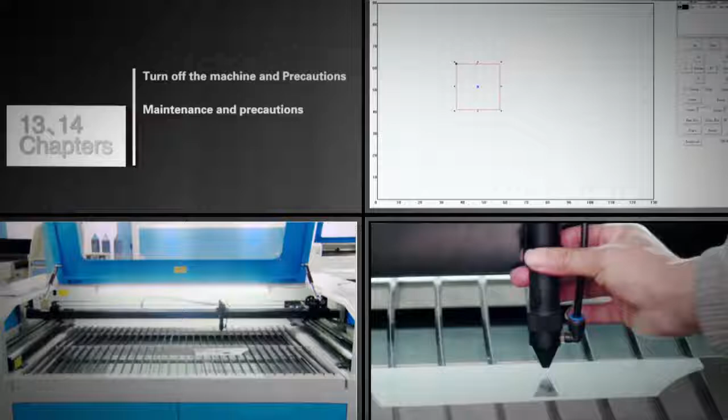Installation and operation of the JQ1390 laser machine.

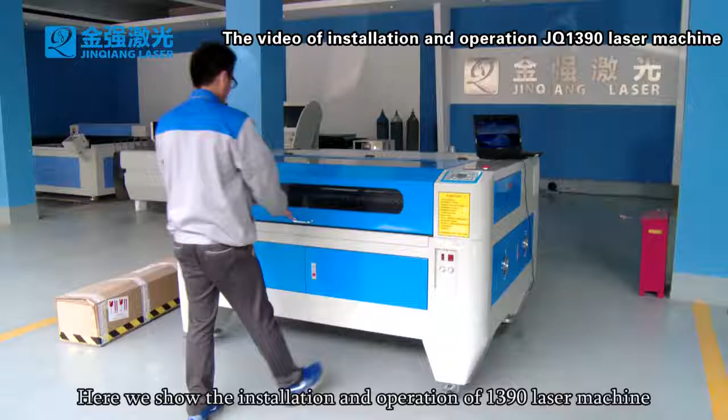Preparations before installation. Here we show the installation and operation of the 1390 laser machine. Before installation, we should prepare 220 volt and 110 volt power supply, a computer, pure water, screwdrivers, pliers, and a voltage regulator, in case the voltage is unstable or the laser power is higher than 150 watts, it is suggested to equip one.

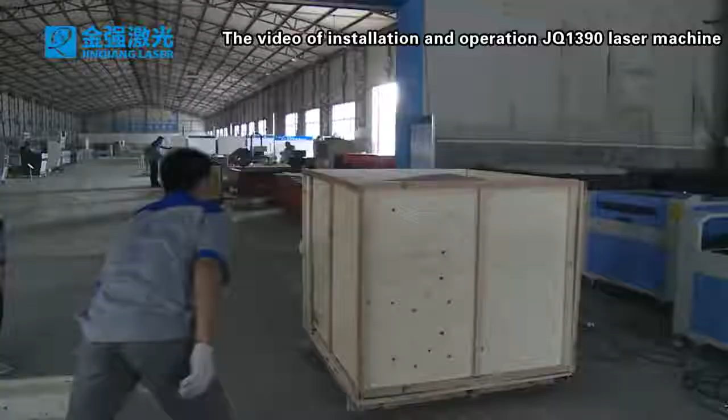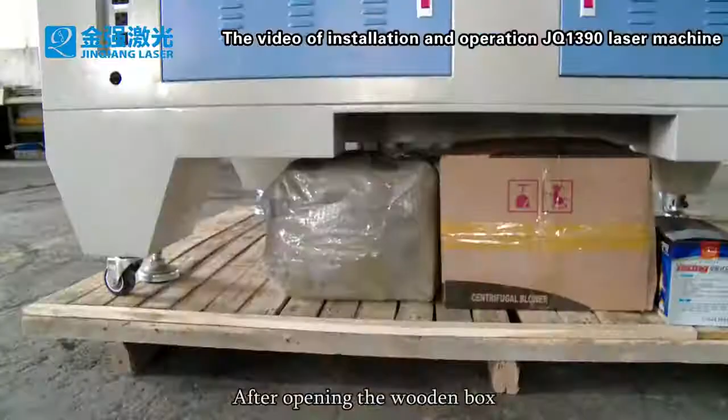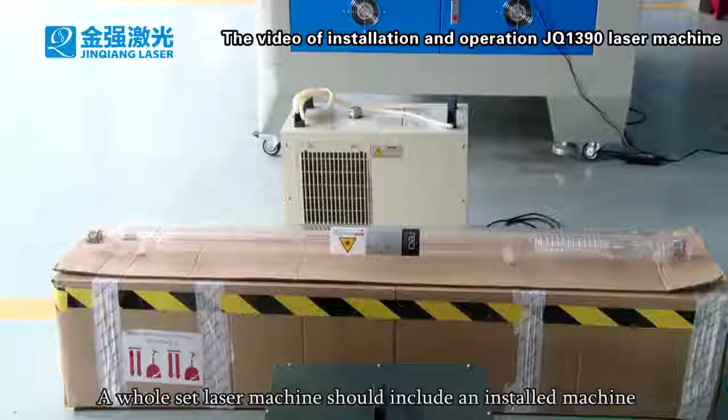Open the package and verify the machine accessories. Firstly, remove the outer wooden box, then tear down the machine's outside stretch film carefully. After opening the wooden box, find the related accessories and double check. A whole set laser machine should include an installed machine, laser tube, water chiller, air pump, exhaust fan, toolbox, and file bag. After careful inspection, please contact our factory promptly if there is any damage.

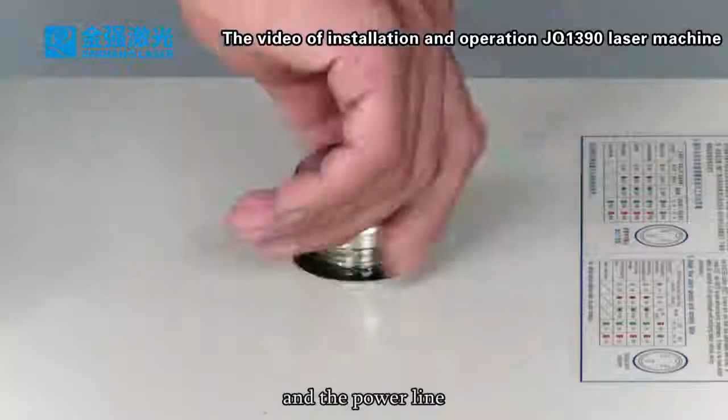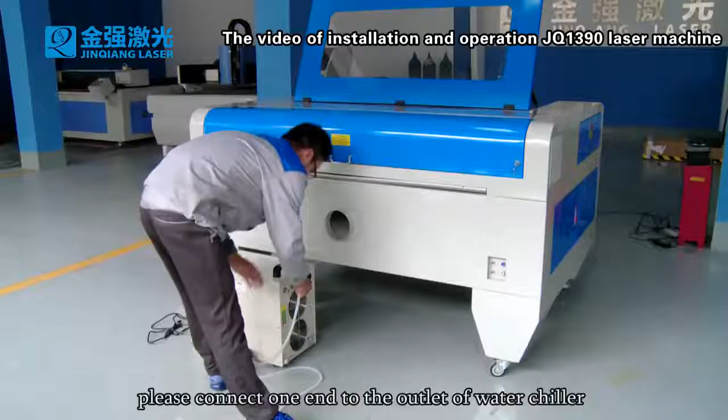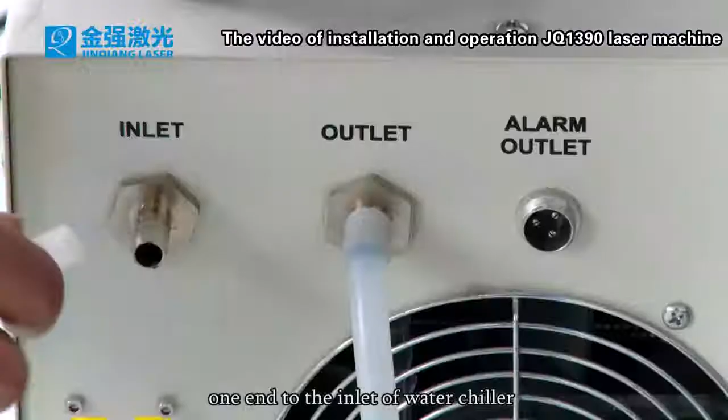Chiller installation. Firstly, find the water chiller, two water pipes, and the power line. Open the water injection cap of the water chiller to fill in pure water, then tighten the cap. Connect the water pipes: connect one end to the outlet of the water chiller and the other end to the inlet of the machine. Then connect the other pipe, one end to the inlet of the water chiller and the other end to the outlet of the machine.

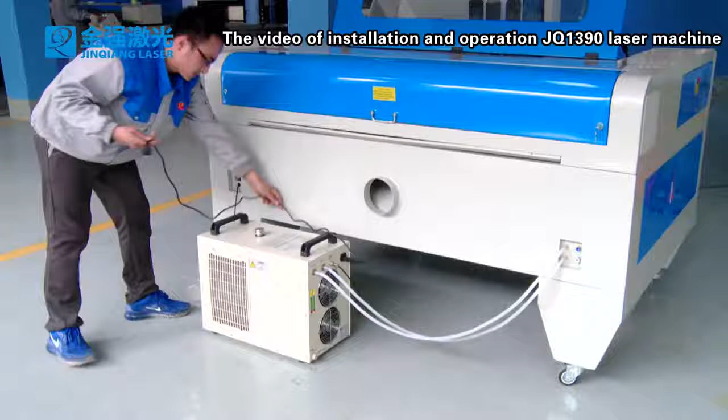Find the water protection line and put the right end to the connector of the water chiller. Then connect the power line to the back socket of the machine. Make sure the water chiller is off. Different machines use different water chillers; we also have CW3000, CW6000 and others, all installed in the same way.

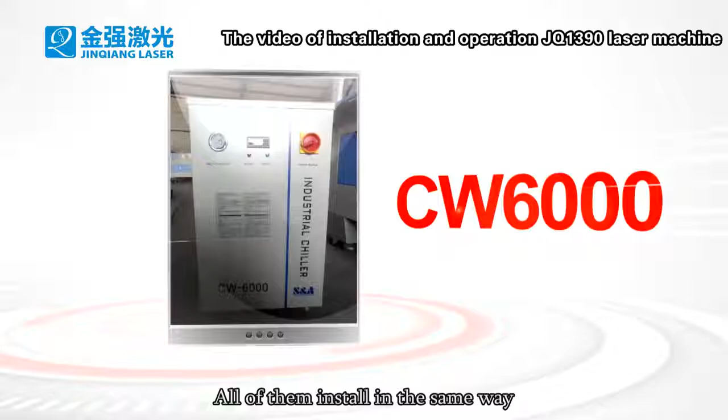Pump installation. Find the air pump, connect one end of the air pipe to the air pump and the other end to the air inlet of the machine. Then connect the power line of the air pump to the back socket of the machine.

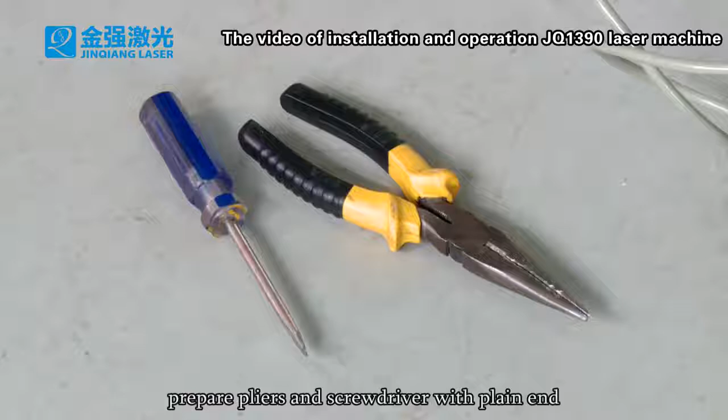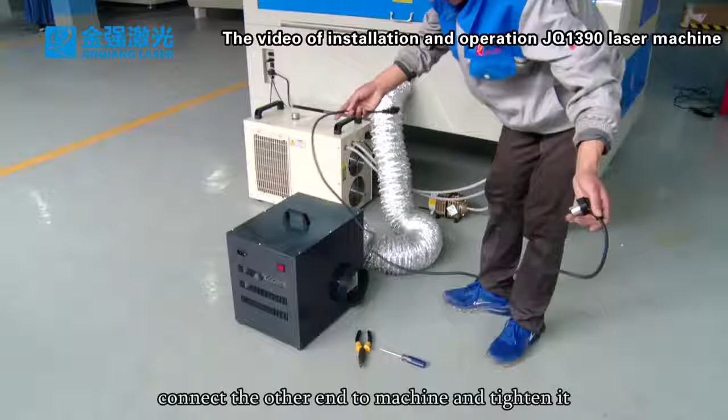Exhaust fan installation. Find the exhaust fan, air pipe and power line. Prepare pliers and a screwdriver with a plain end. Get the air pipe and hoop, and clamp the hoop to the air pipe. Connect one end to the inlet of the exhaust fan and tighten the hoop. Connect the other end to the machine and tighten it. Then connect the power line. Please make sure the exhaust fan is closed after installation.

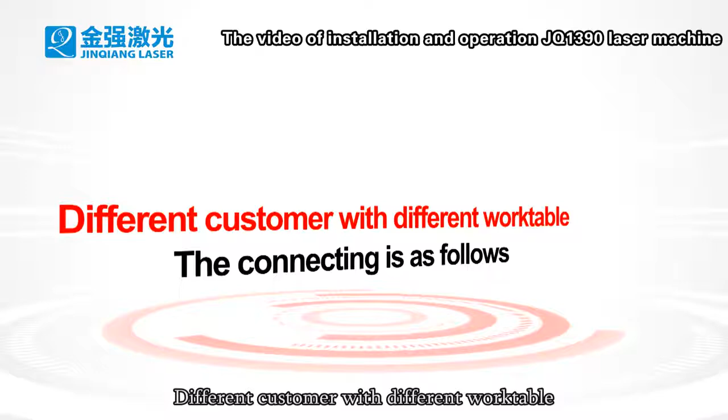Different customers use different work tables; the connection is as follows: blade work table, honeycomb work table, up-down work table.

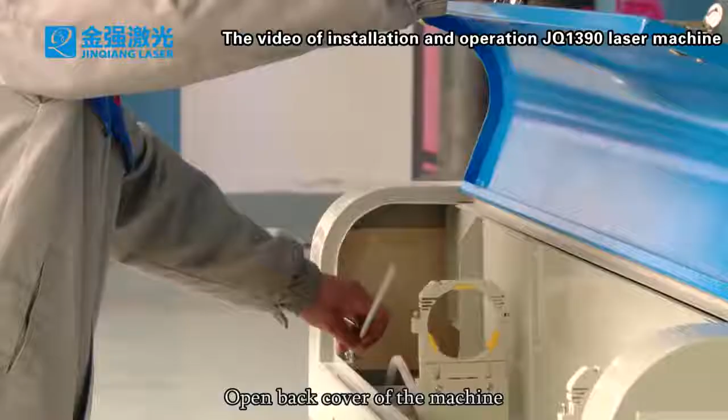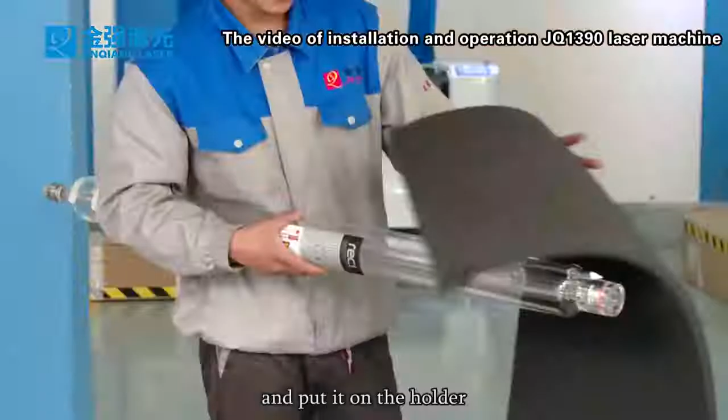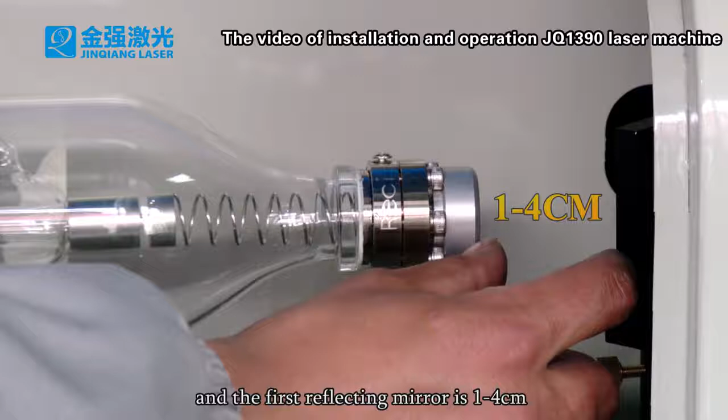Laser tube installation. Open the back cover of the machine and hold it up. Remove the screws on the laser tube holder. Take out the laser tube from the packing box and put it on the holder. During installation, ensure the distance between the laser outlet and the first reflecting mirror is 1 to 4 cm. The water outlet should be upturned. Then tighten the laser tube holder screws.

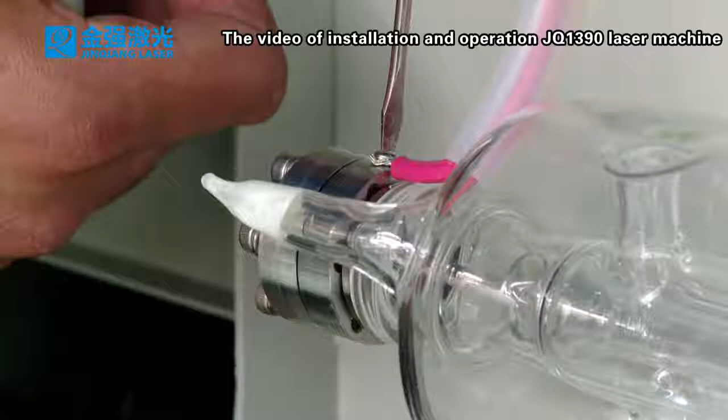Connect the laser tube inlet and outlet pipes well. Take down the high voltage cap, tighten the high voltage line and cover up the high voltage cap. Then connect the low voltage line and tighten again. For other different models of laser tube, the installation is similar.

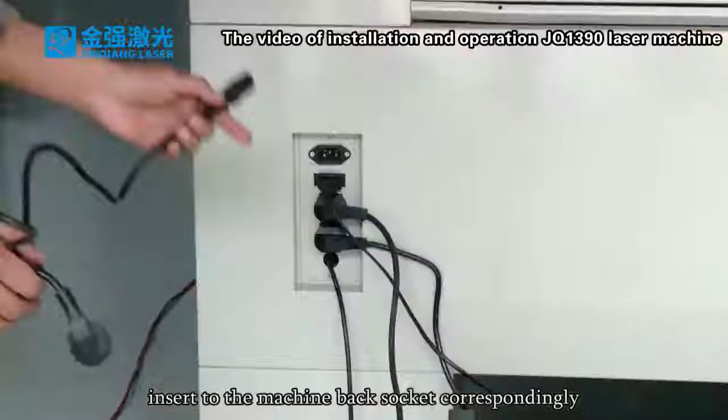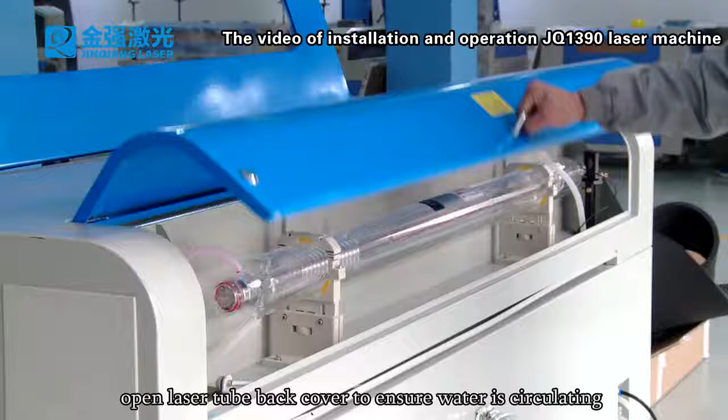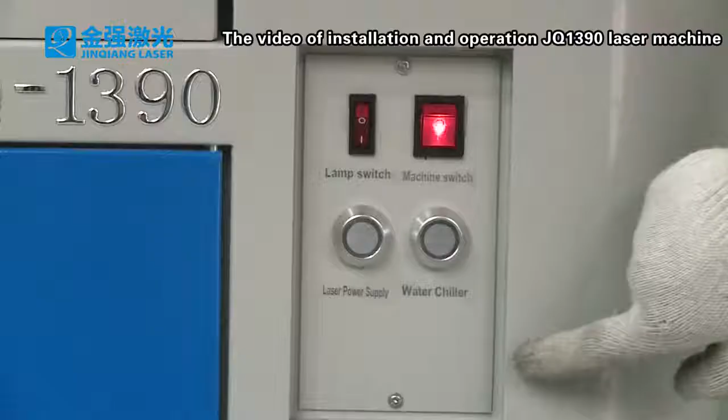Turn on the machine under precautions. Find the machine's power line and insert it into the machine's back socket correspondingly. Insert the power line plug into the power supply board to provide power. In sequence, turn on the emergency stop switch, machine switch, and lamp switch. Then turn on the water chiller switch. Open the laser tube's back cover to ensure water is circulating; when the laser tube is filled up with water, there will be no air bubbles inside. Finally, turn on the laser power supply switch.

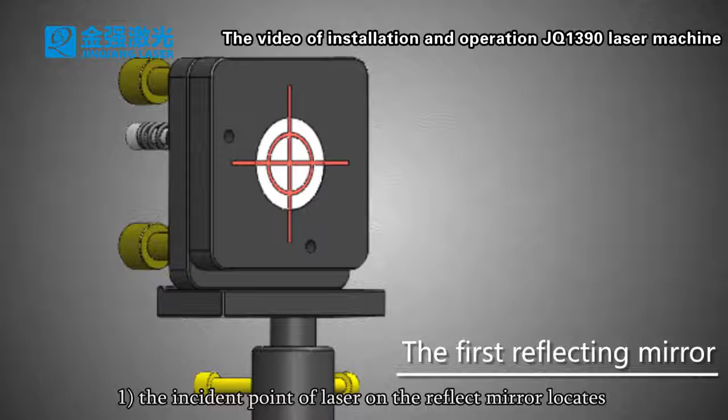Laser path adjustment. Laser path adjustment requirements: first, the incident point of the laser on the reflect mirror should locate within a 10 mm diameter range of the lens center, as close to the lens center as possible. Second, when the laser head is at the four limit positions of the machine—top left corner, bottom left corner, bottom right corner, and top right corner—the laser beam should enter from the front center of the laser head and shoot from the center of the focus lens.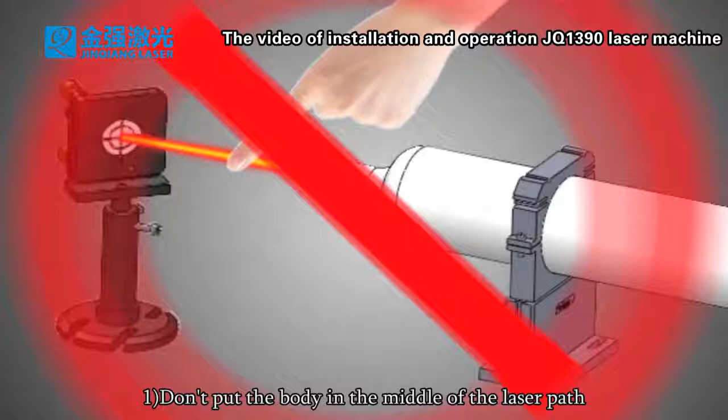Notice when adjusting laser path: don't put the body in the middle of the laser path to avoid laser burns. Before adjustment, we must install the cooling water. It is forbidden to adjust the laser path when cooling water is uninstalled or when cooling water circulation is poor.

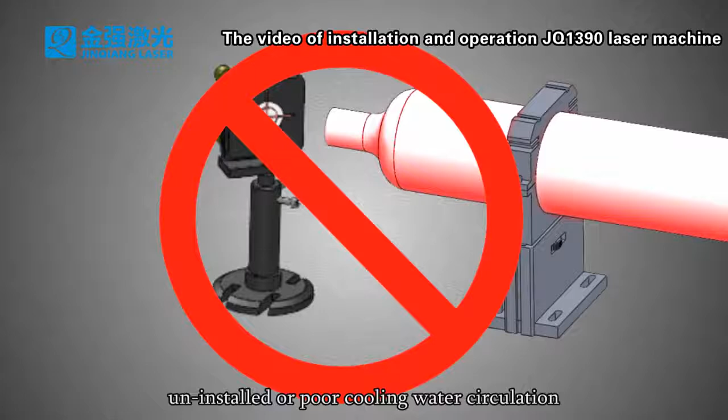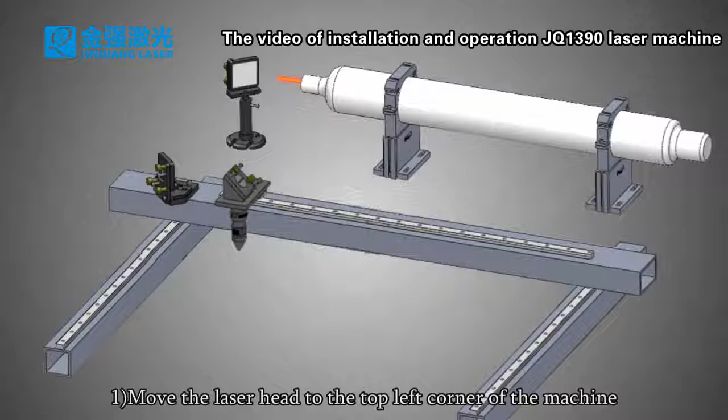Laser path adjustment steps: first, move the laser head to the top left corner of the machine. Prepare a piece of transparent acrylic and press laser to test whether the laser should shoot on the center of the first mirror and the second mirror, within the range of 10 mm diameter.

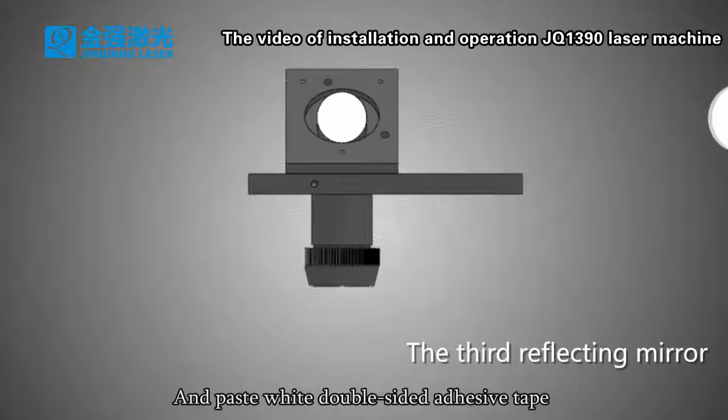Remove the third reflecting mirror and the focus lens cone to prevent lens contamination, and paste white double-sided adhesive tape on the third mirror position.

Make sure the top left and bottom right corners are in coincidence, then adjust the laser head to the center.

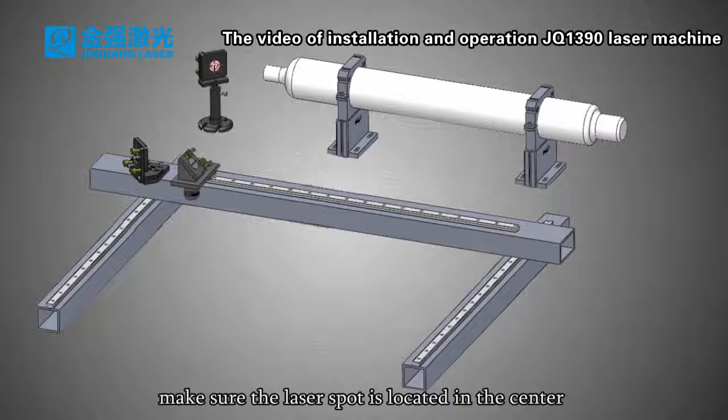Move the laser head to the top left corner of the machine and press laser. Make sure the laser spot is located in the center of the round hole, within 2 mm diameter range, letting it approach the center as close as possible. If it is not in the center, adjust upper and lower deviation, and left and right deviation.

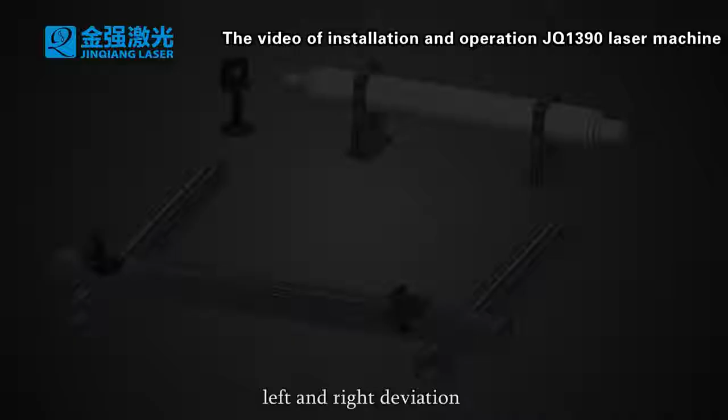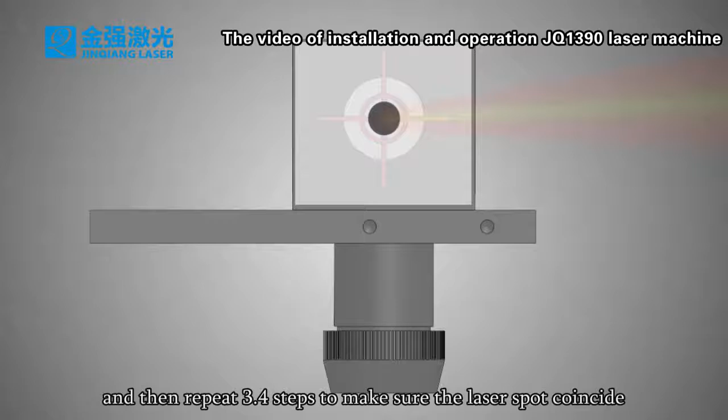Upper and lower deviation adjustment: if the laser spot has upper and lower deviation, lower or raise the laser tube by adjusting the front bracket with the knob. Clockwise is for upper, counterclockwise is for lower, until reaching the center. Then repeat steps 3 and 4 to make sure the laser spot coincides, and repeat steps 6 and 7 until the laser spot is in the center.

Left and right deviation adjustment: if the laser spot deviates left or right, move the second mirror frame outwards or inwards. If the laser spot is left of center, move the second mirror outwards; if it is right of center, move it inward, and then repeat step 4. Let the x-axis points coincide with the laser spot, then repeat step 8, repeating steps 4 and 8 until the laser spot is completely in the center of the hole.

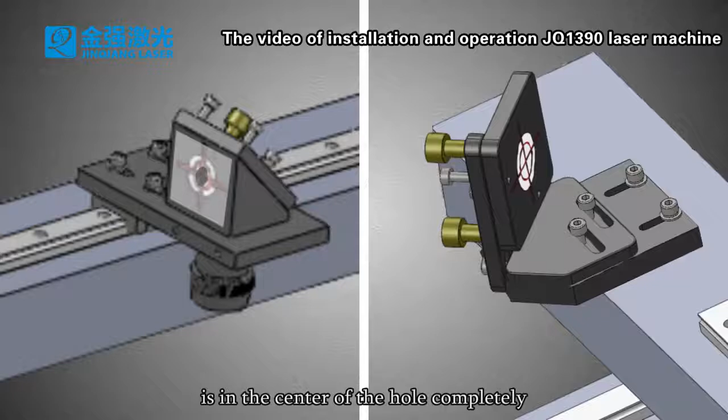Finally, verify the laser head at the top left corner, bottom left corner, bottom right corner, and top right corner, checking whether the laser is in the center and coincides. If not coincide, repeat the above steps.

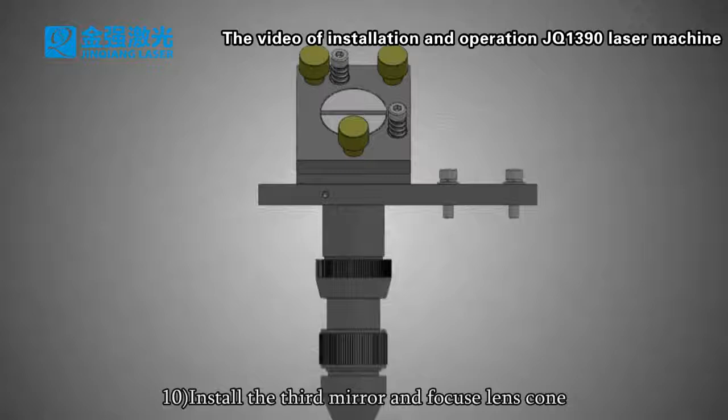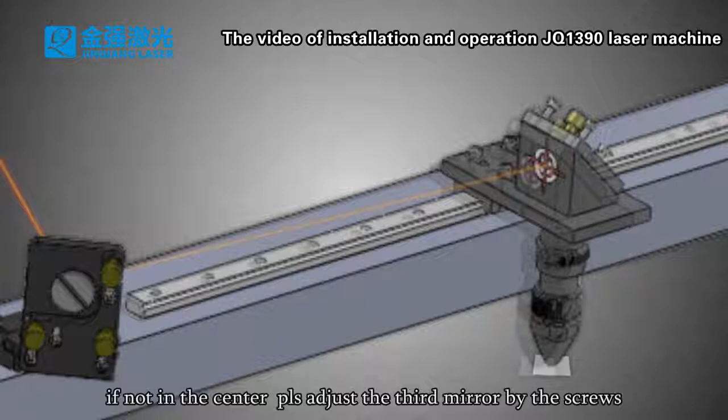Install the third mirror and focus lens cone. Adjust the laser outlet center position using the double-sided adhesive tape, press laser to get a spot, and let the laser spot out from the nozzle. If not in the center, adjust the third mirror using the screws until the spot shoots from the center of the nozzle.

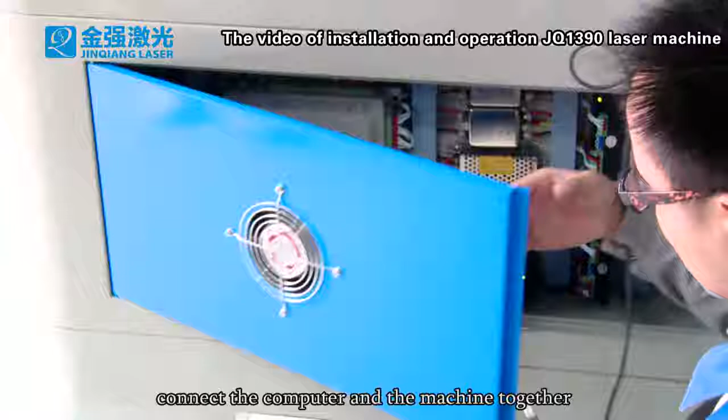Machine software installation and download test: find the data cable from the file bag, connect the computer and the machine together, find the CD, and put it into the computer's CD-ROM drive.

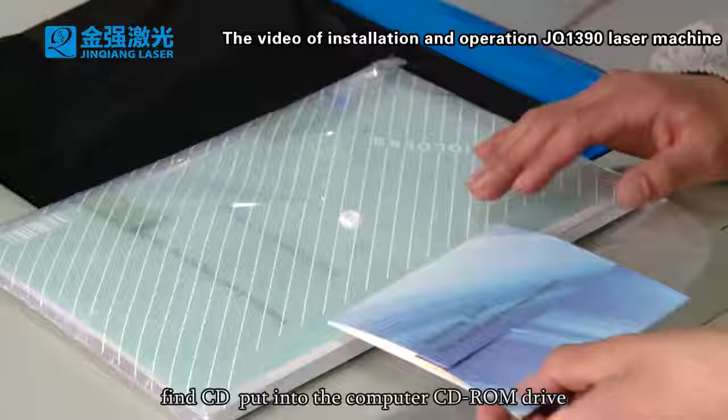Copy the software to your computer, open the software installation program, then install the software.

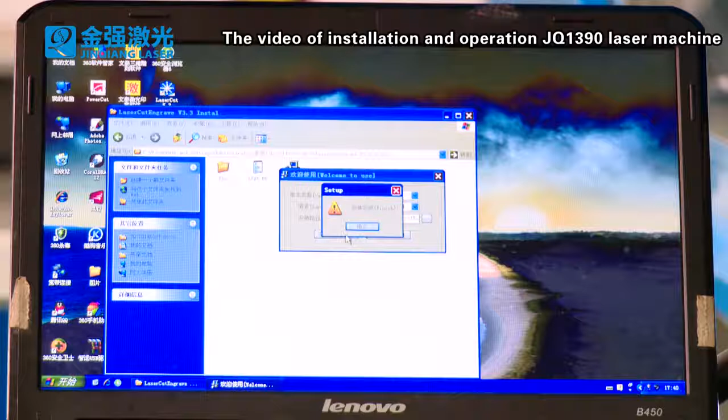Open the software using the desktop icon after installation. Draw a simple square, set up parameters, then choose and download.

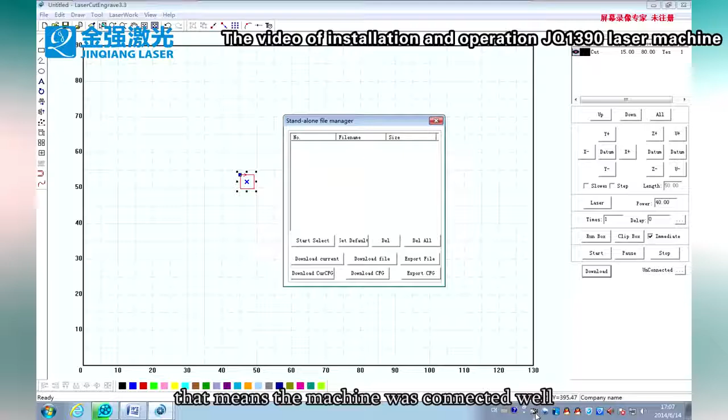If you can hear the voice D from the machine panel, that means the machine was connected well. A detailed introduction of the laser software is in the CD-ROM, please read it carefully.

Attached software usage: mainly used design software such as CAD, ArtCAD, Adobe Photoshop, CorelDRAW, and Adobe Illustrator. Designs made with Adobe Photoshop can only be used for engraving patterns, while the others can be used for engraving and cutting patterns.

Now we take CAD as an example: draw a simple figure using CAD and save it in DXF format.

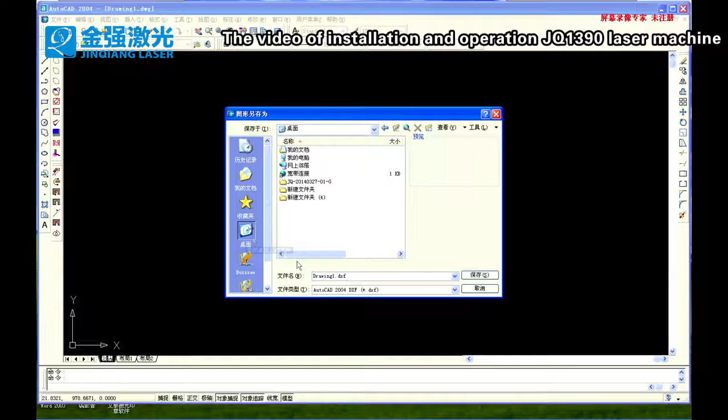Open the laser machine software and import the saved figure. You will be prompted to merge connected lines. Fill in the combined tolerances, and make the figure close. Then set the parameters for cutting or engraving.

Download to the machine and process. If using other software that requires different operations, please read the operation manual.

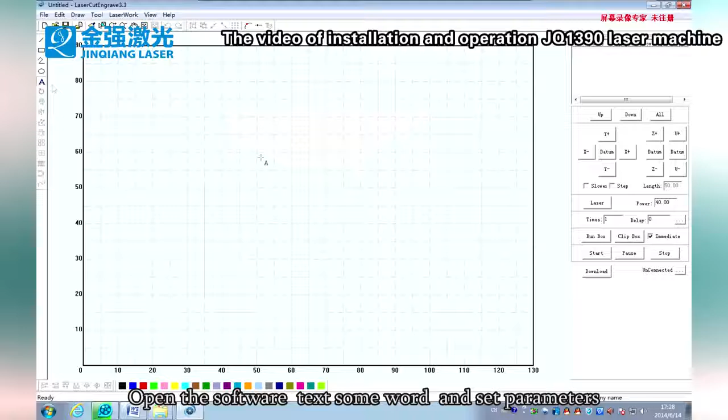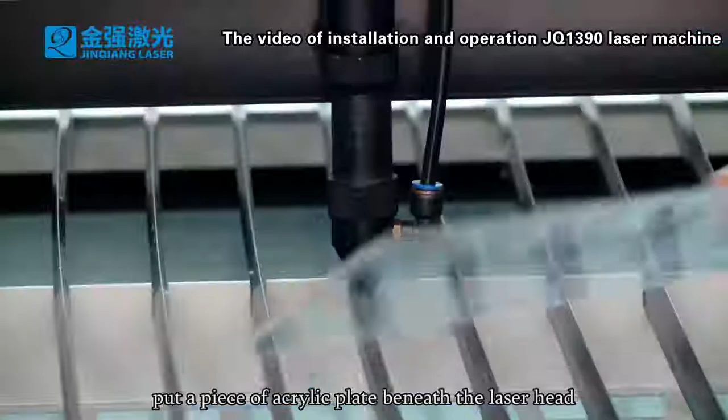Cutting and engraving functions. Open the software, type some words, and set parameters. Put a piece of acrylic plate beneath the laser head, adjust the standard focal length, then start to engrave.

Cutting operation is the same. Use the software to set the cut figure, then put an acrylic plate to the laser head to see the effect. Shape cutting is also perfect.

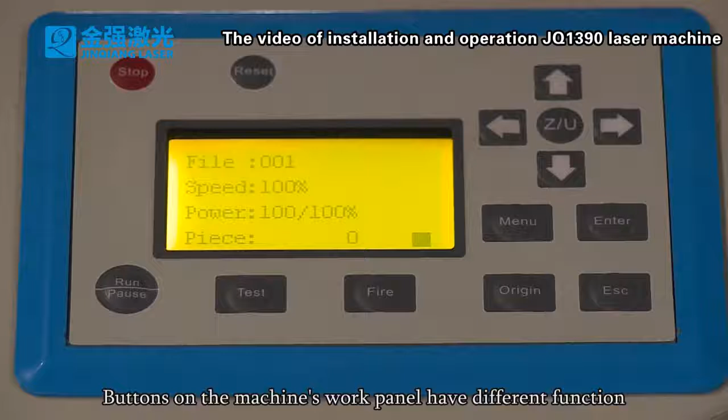Machine control panel functions and using. Buttons on the machine's work panel have different functions. First, you can press the reset button to reset the machine.

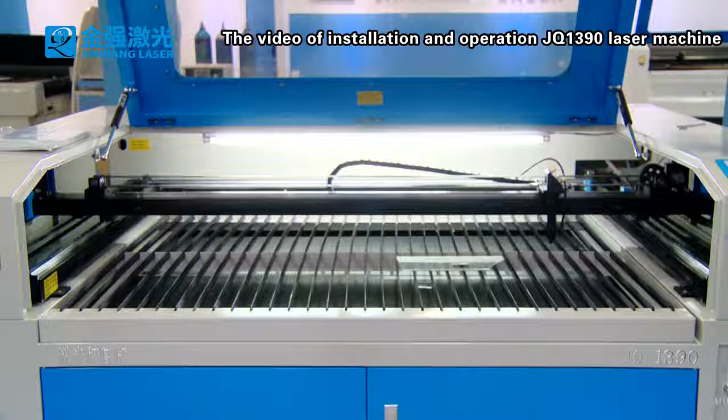Then press the upper and lower, left and right direction buttons to adjust the position of the laser head. Press the locating key to locate, and press the test button to test. If there's no problem, you can press the Run/Pause button to work.

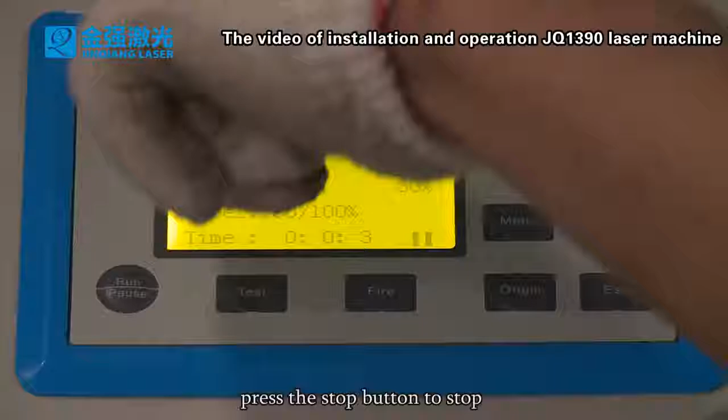When working, you can press the pause button to pause, and press the stop button to stop. If the machine has unforeseen circumstances, you can press the emergency stop switch to make the machine power off.

By pressing the Z and U keys on the front panel, you can convert up and down work platforms. You can press the up and down arrow keys to make the platform go up or down. When the platform reaches the limit, it will automatically stop.

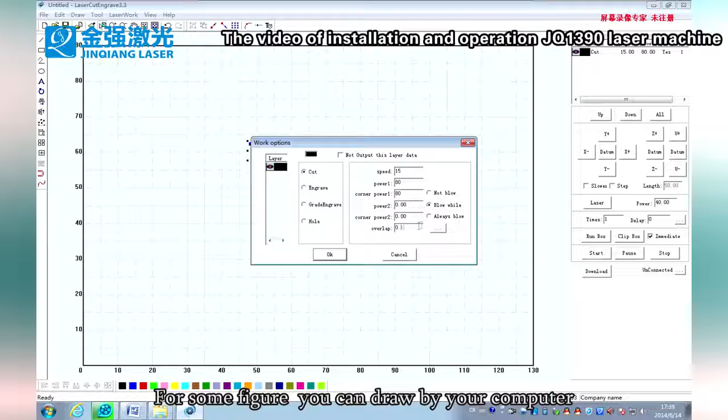There are two types of downloading: online downloading and offline downloading with UDisk. UDisk downloading operates as follows: for some figures, you can draw them on your computer and click to download. Save the output path to the UDisk.

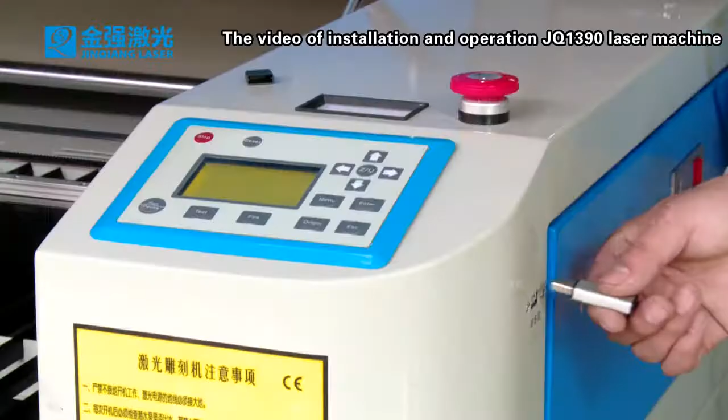Insert the UDisk into the machine's USB interface. Click the panel and select the file name, then press Enter. The files will be saved on the panel. Then unplug the UDisk and click the panel to start processing.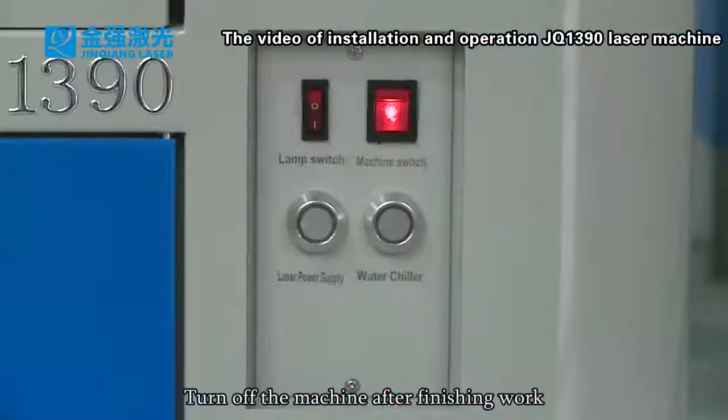Turn off the machine and precautions. Turn off the machine after finishing work. Turn off the laser power switch, water chiller switch, lamp switch, machine switch, and the emergency switch in sequence. Close the machine cover and disconnect the machine's main power to keep safe.

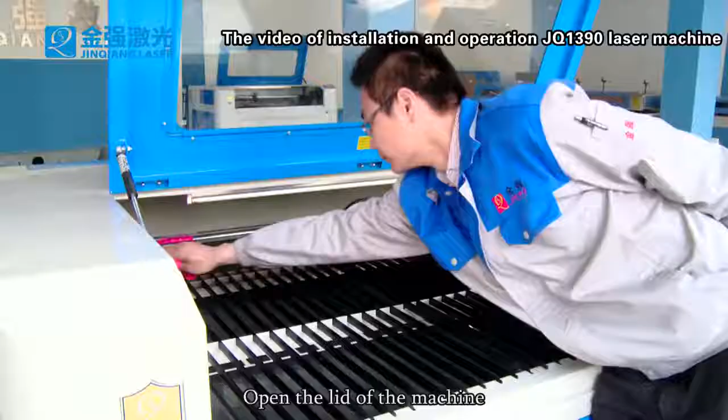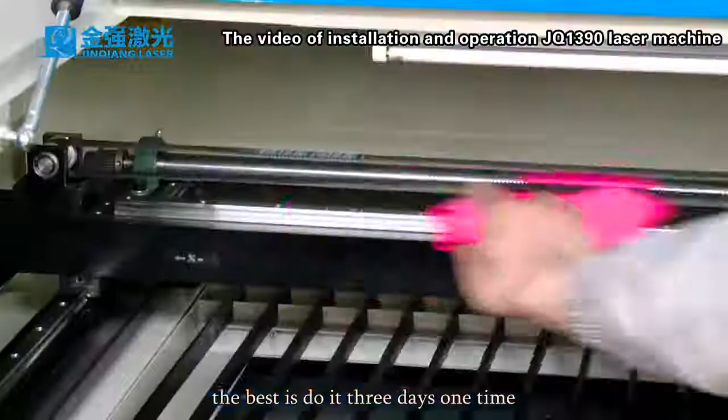Maintenance and precautions. Regular maintenance of the machine is needed. Open the lid of the machine, wipe off the dust on the rail with a clean rag, then pour machine oil on a clean cloth and wipe it again. The best practice is to do this every 3 days.

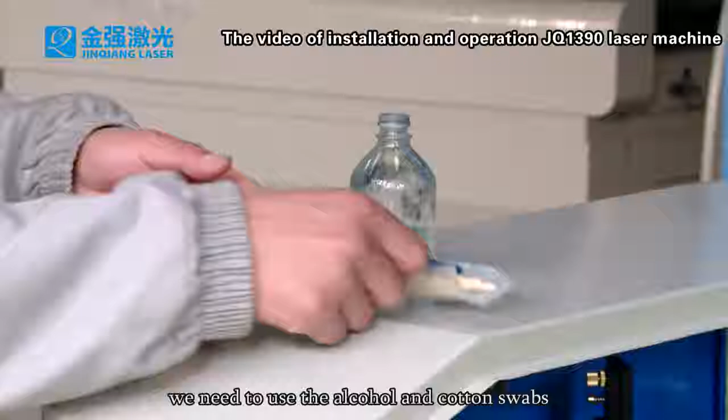Another irregular maintenance task is for the 3 reflective mirrors. Because of the particularity of the mirrors, we need to use cotton swabs. First, wipe off the dirt on the mirrors carefully with a cotton swab moistened with alcohol. After the mirrors are clean, suck up the residual alcohol with a dry cotton swab.

Before we clean the focus lens, we need to carefully open the lens cone with the cone tool.

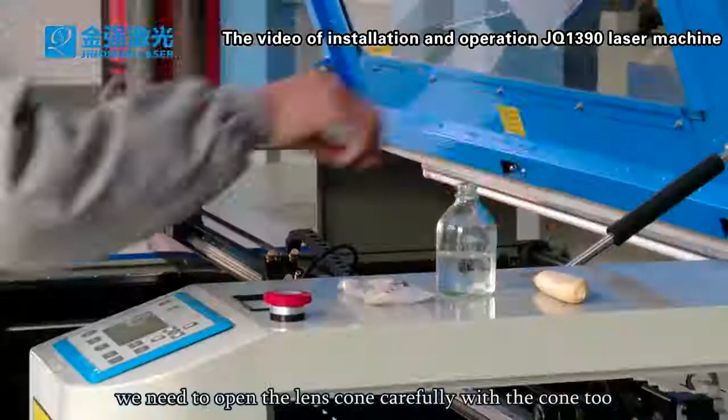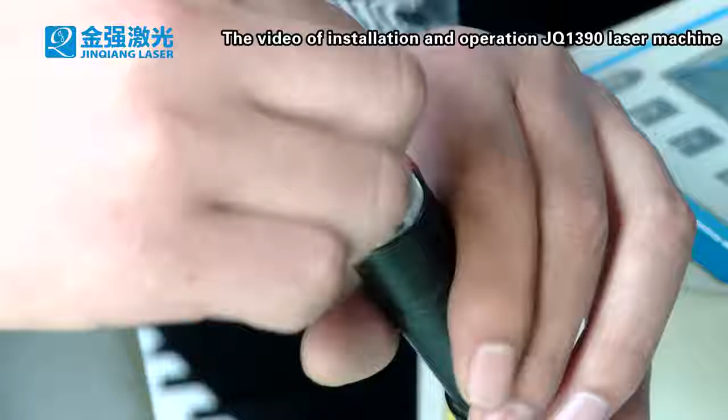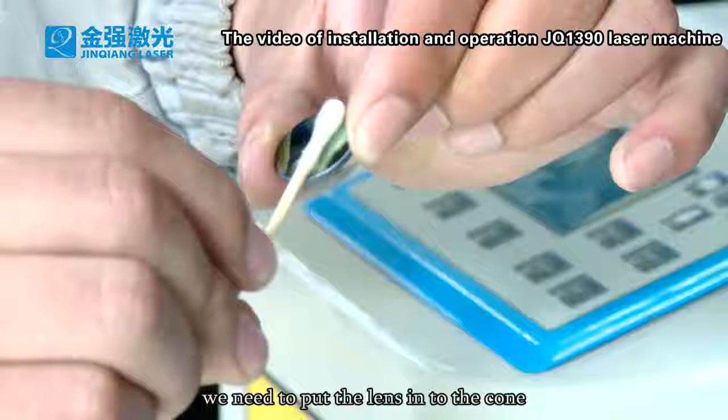After finishing the lens maintenance, we need to put the lens into the cone. Make sure the convex surface faces upward in the cone, then put it carefully into the cone. Tighten carefully with the tool, shaking the cone lightly. It's okay if the lens doesn't shake in the cone, then tighten it onto the laser head. Lens maintenance should be done once a day. Close the lid of the machine after maintenance.

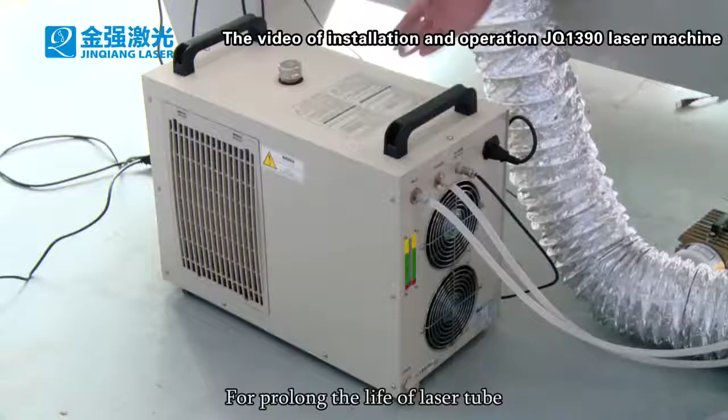For prolonged life of the laser tube, the cooling water in the chiller should be changed regularly. Open the drainage switch of the chiller and drain out the water, then refill the chiller with pure water. It should be replaced once every 7 days.

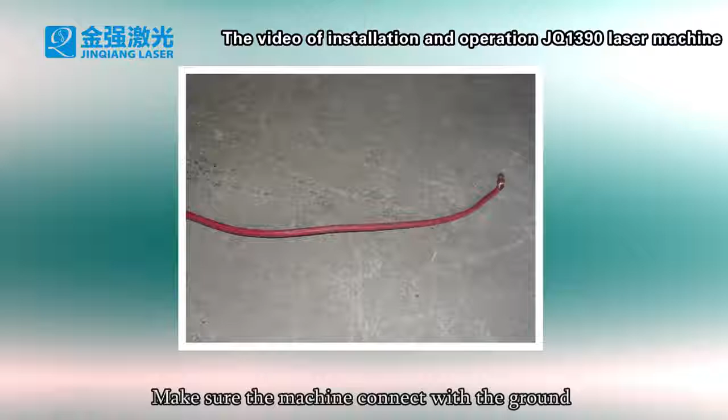When you're not using the machine for a long time, or during freezing winter conditions, make sure to drain the water from the chiller and laser tube. Make sure the machine is connected to ground: one end connects to the machine's ground wire interface, and the other end connects to outdoor moist soil.

The installation and instructions of the 1390 laser machine were covered here. Hope you understand it well. Finally, we wish everything goes well for you.